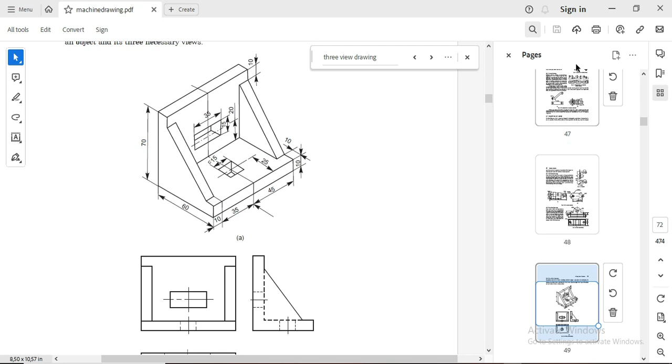In this video, we are going to draw this figure in front of us. Okay, so we're going to check the dimensions first. As we can see, they are in millimeters. So that will be the first action.

The second action will be going into the projection here. So without wasting much time, what we're gonna do is we're gonna go new there. We go metric, standard millimeters, and then we go create. So once we're here, we're gonna start with the rectangles because it's gonna be easier that way.

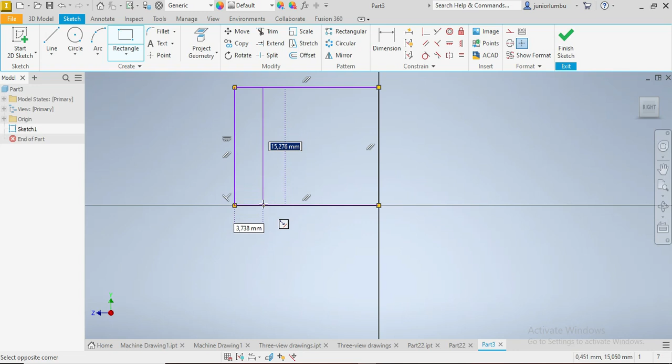So there is our first rectangle. There is our second one. There is our third one. I want the dimension from there to here to be 60 millimeters, 60. And this one here needs to be 70.

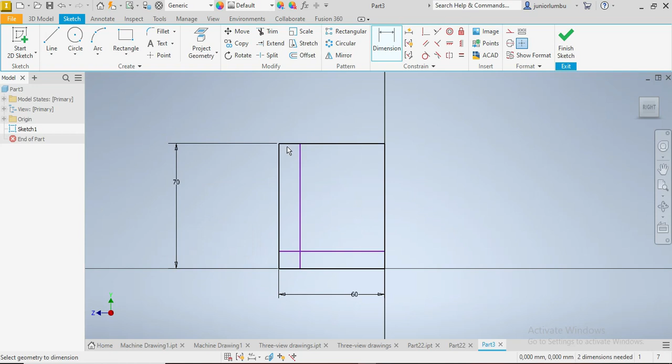That's one from there to there, that one needs to be 10 millimeters. And this needs to be 10 millimeters as well. So 10 millimeters. The next thing that we're gonna go is that line there. And from there to there, that needs to be 10, and from here to there, that needs to be 10 as well.

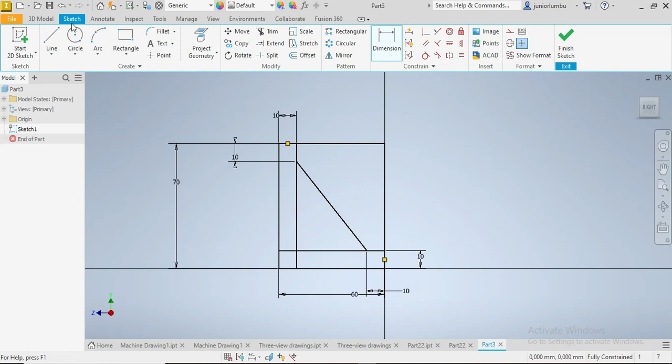Great. After that, we're going to go for those two little guys, that one and that one, the one that we're having there. And then this one here, from there to there, that one needs to be 15 millimeters.

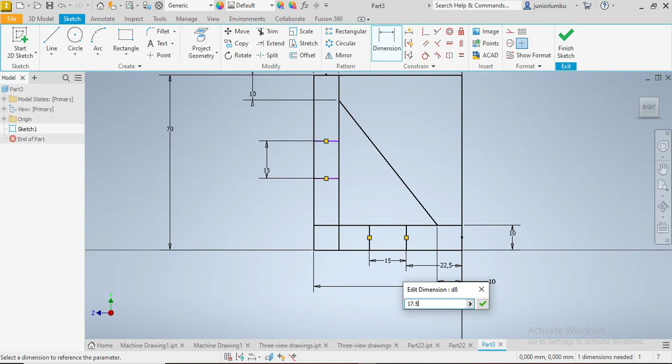As well, this one from there to there needs to be 15 millimeters, and from here to there, that one needs to be 17 and a half. And from here to there, that one needs to be 20.

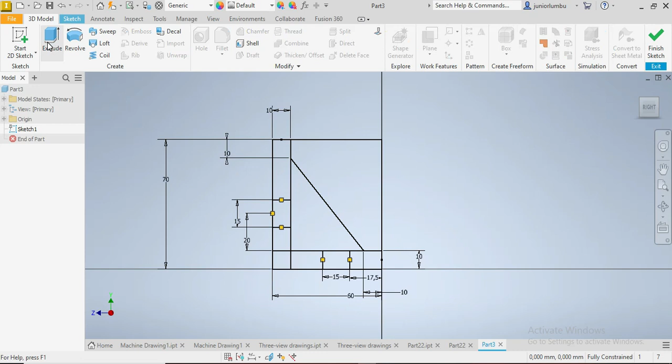So what we're gonna do now, we can say finish sketch, or we can go on 3D model then, and then we're going to extrude. So we're gonna extrude this whole part, that one, and this one by 90 millimeters. So 90 millimeters, okay, both sides of the drawing plane. We go like that, and we say okay.

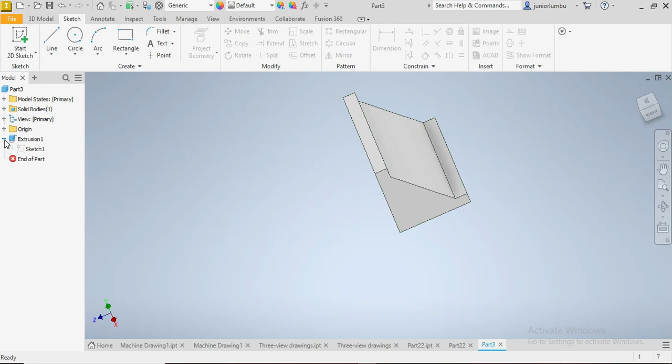Now we can come here and say visibility on, right? Then go on 3D model again, extrude. This whole thing now we're going to cut. That's one by 70, so 70. Both sides of the drawing plane, and then it goes like that.

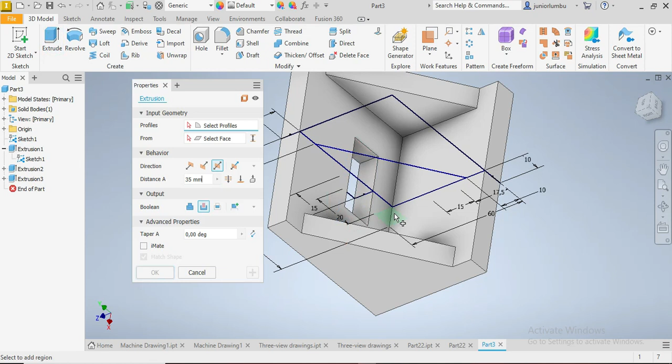Again, we're going to press this extrude and come here. That one, we're gonna extrude it by 35 millimeters. So we're cutting like that, and then we say okay, we're gonna come back here. That's one as well. Now by 15 millimeters. We're going to cut it, okay, like that, and then we say okay.

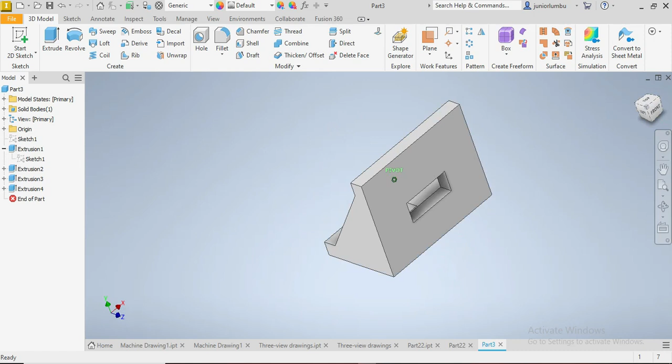So the next thing that we're going to do is sketch visibility off. Now you have your figure. Now what we can do is we're gonna choose the material. We can say even gold is fine.

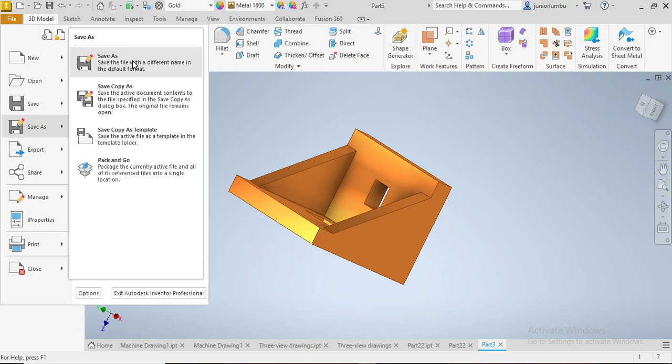So we need to save this drawing in order to project it. So we're gonna save it like this. Save as 33. Enter. There you go.

And then here we're going to come there and then say new sketch and create drawing now. Choose that template and then we say create.

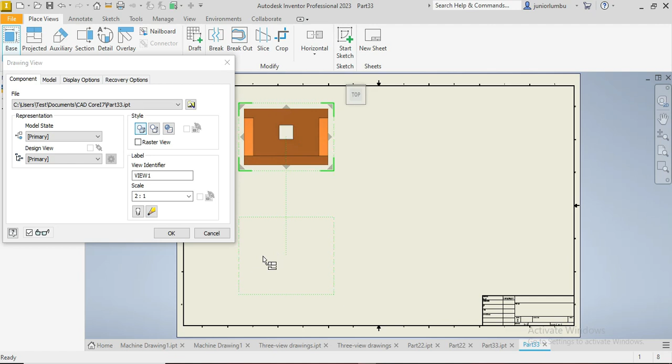Once we're here, we're gonna choose our base drawing. So that's one. Which one is better? Let's see, like that, this one is better. So scale 2 times. Great. We have it there, the front view. Then you have that view, this view, and that view. And then we say okay.

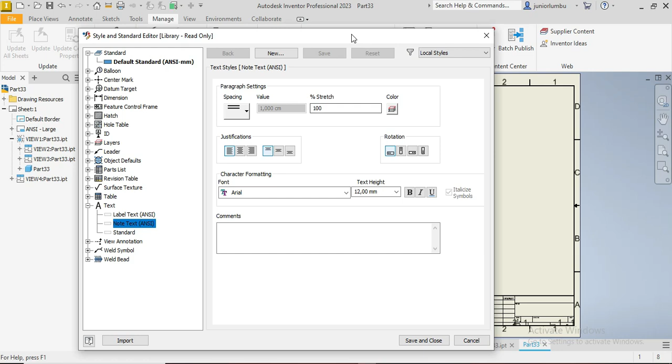Now we're gonna give dimensions, so we come annotate dimensions. So this one here, okay, we say okay. Now I see that the dimensions are too small, so we can come here and manage style editor. Taking some time, we can come on text, you come here, okay, you say I choose that one, I want 12. Save, okay, that's bigger now. All right, I say save and close.

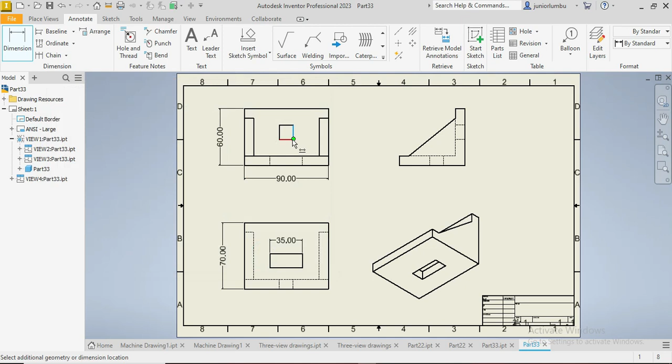Now, dimension. So this one here, from there to there, I have it there. From there to there, 70. All right, that's one, 35. Okay, this one here, come on, from there to there we have 15. And what else? So the rest you can do yourself.